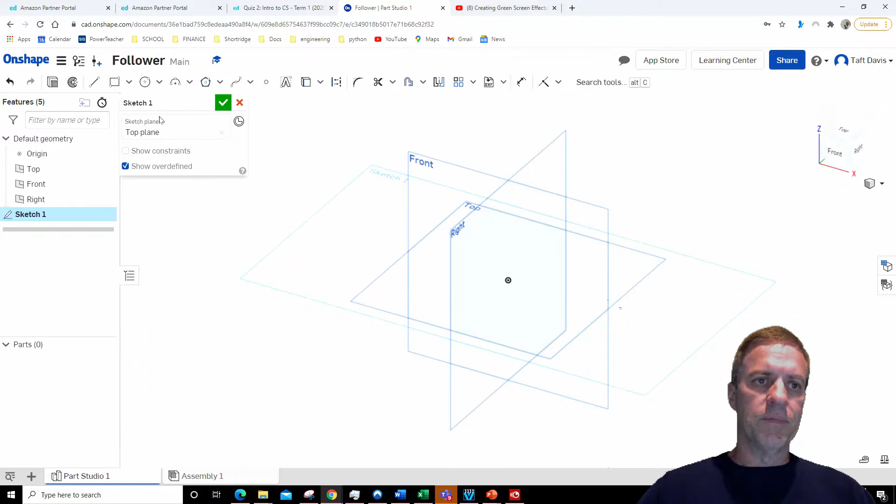Call this the follower. And this will be the simplest one we've done so far. So I'm going to click on Sketch, click on Top, click on my circle, drag it out, then I want this to be 0.25 inches.

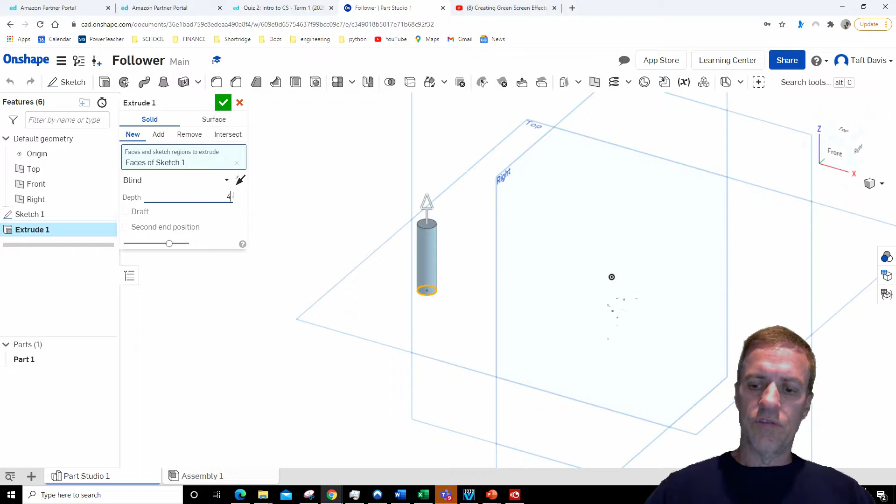All right, now I want to extrude, and I'm going to extrude this 4 inches.

All right, now I want to rotate this around so I can see the bottom, and I want to do a fillet on the bottom. So I'm going to click on fillet. I want it to be half the diameter of the follower. So half of 0.25 is 0.125.

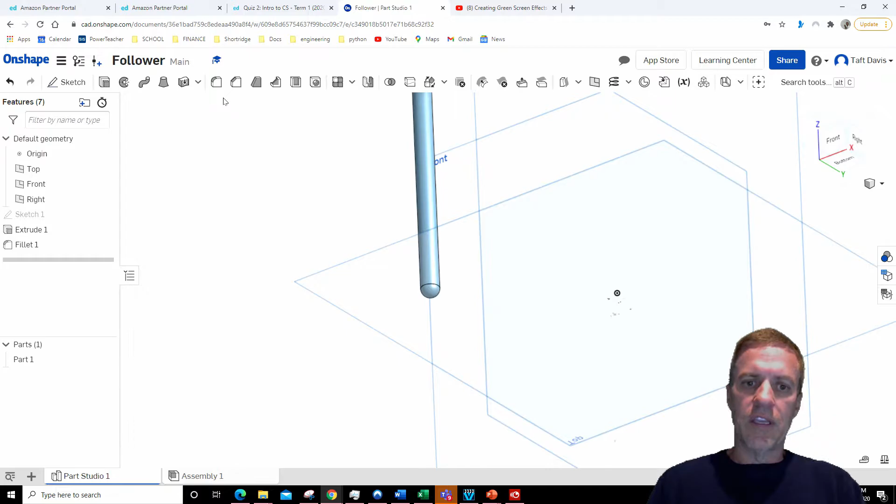Now I'm going to click on this bottom edge. So that kind of rounds off the follower so that as it's sliding on the cam, it doesn't get hung up on the corners. All right, now I'm going to click back over here on the Onshape.

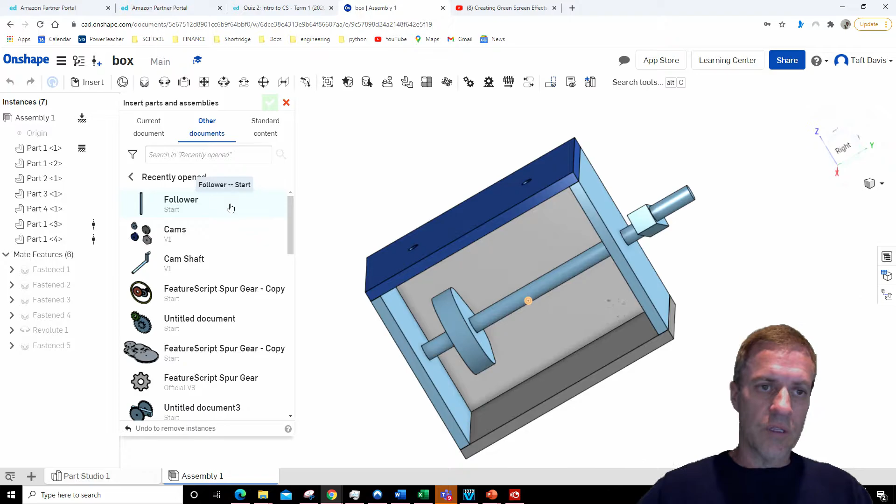Click on the box. All right, I've still got my box here with the one cam that I've put in. I'm going to insert, click on Other Documents, recently open, and the follower will be the most recent one because that is the one that I just did. So I click on Follower.

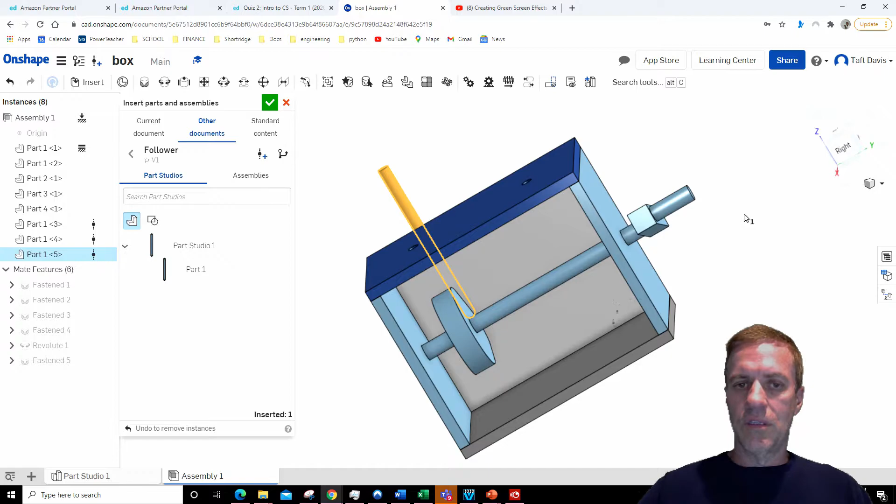I want to create a version, and I can name this something different if I wanted to, but that's V1 for version 1. I'll just leave that the way it is. I left click on the part, release, drag it over. And if you're putting in 2, then go ahead and drag 2 of them on. For this demonstration video, I'm just putting in 1, but you'll need to put 1 on each of your cams that you've done.

All right, now I'm going to come up here. These are the types of mates that I have. I want this one, my first part, is going to be a slider mate, because I want to be able to slide up and down in that slot.

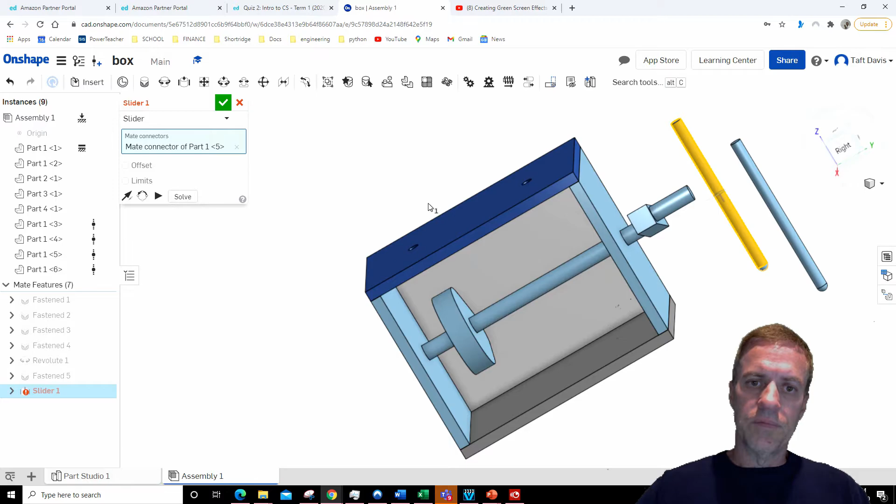I'm going to click on the center of this follower, kind of rotate this around, click on the center of that box, and check that. Okay, now if I left click and hold this down, I can slide it up and down, and you can see that's a slider.

Now, it just goes through the cam, so obviously when I rotate my cam, it doesn't move. So now I need to do a tangent mate with the bottom of my follower and the edge of my cam.

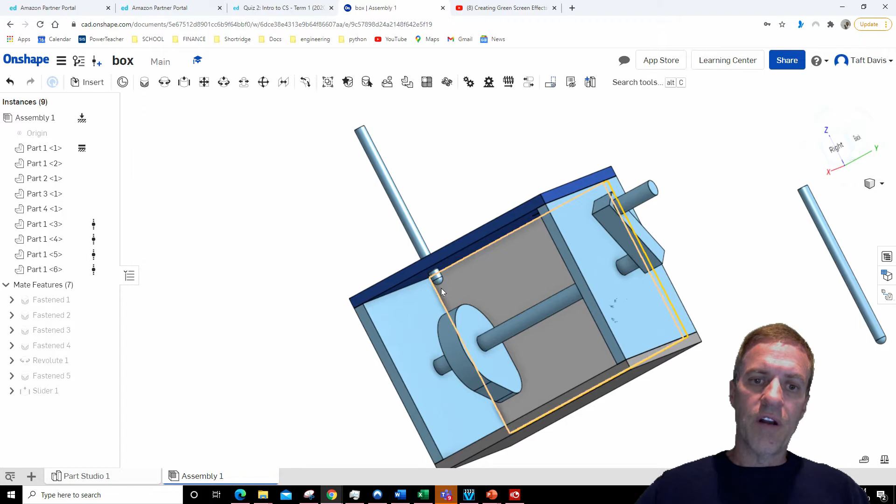So right there's the tangent mate. It's kind of got the curve with a little ball rolling on it. So I click tangent. I'll zoom in here a little bit so we can see that.

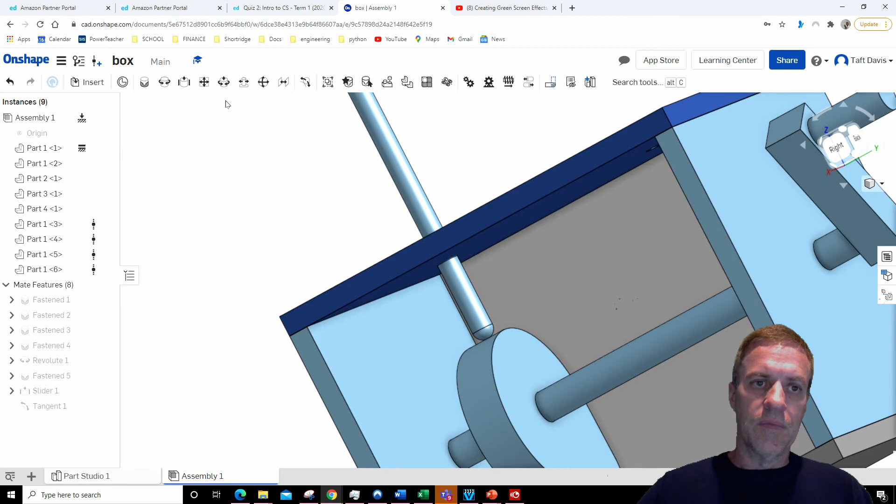And I want to make sure that I get this bottom tip of the follower and just anywhere on this edge. And click OK.

So now if I turn my handle, the follower moves right along the handle edge, or right along the edge of the cam as I crank the handle. And that's all there is to inserting the follower.